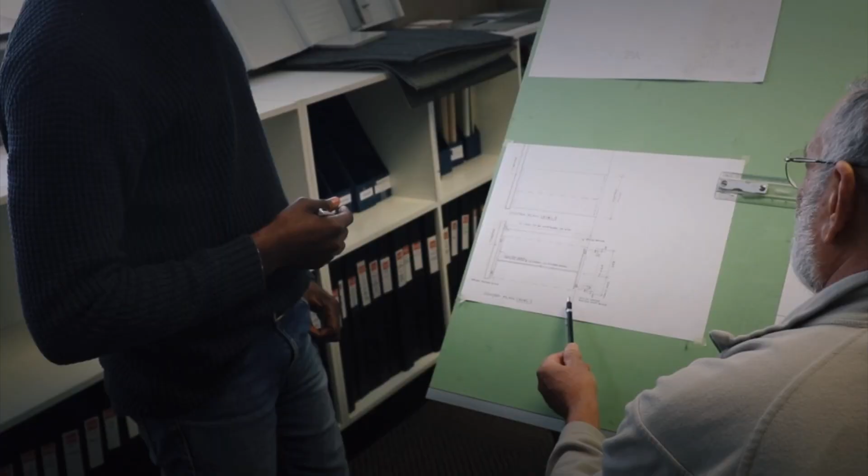Welcome to ACG Architects. We believe in pushing boundaries and delivering innovative solutions. With more than 28 years of experience, ACG Architects, based in Cape Town, is a dynamic, socially conscious professional practice offering sustainable, world-class design solutions for projects of all sizes.

My name is Hassan Asmal. I'm a founding director at ACG. ACG was formed around 1993-94. Myself, Malcolm Campbell, and Geeta Govern, that's how the ACG comes about.

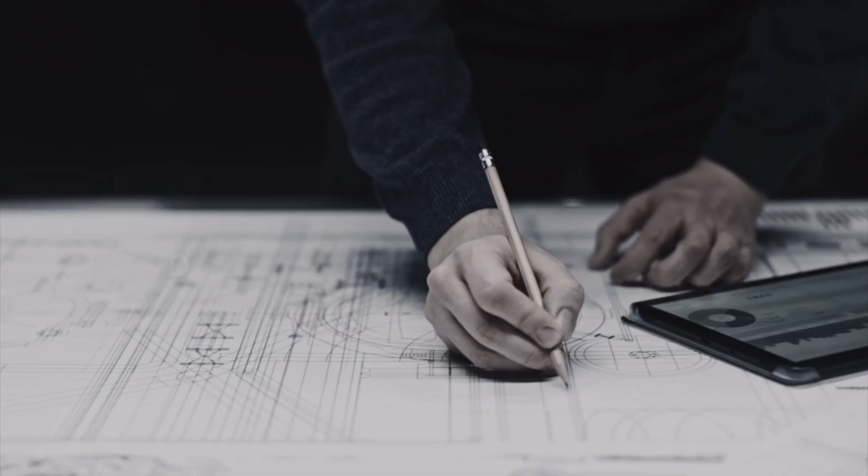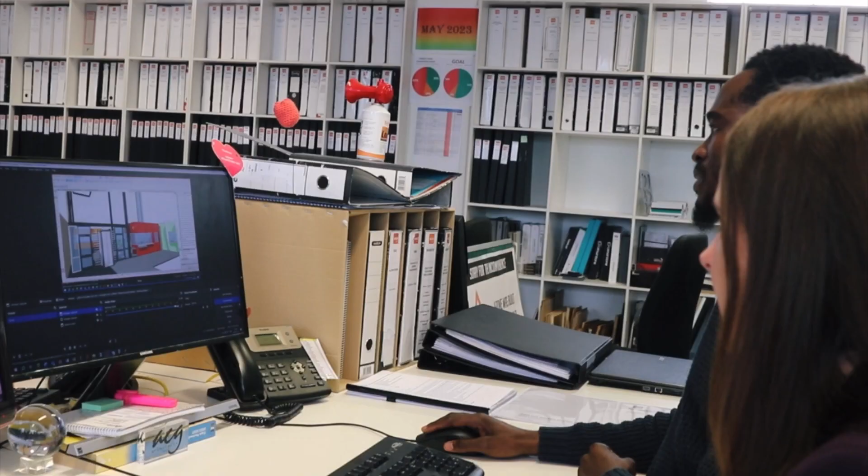It was also an interesting time because architectural practices were moving into the digital sphere. We needed to decide on what platform to go on to. At first, we worked on AutoCAD, which was the program of the time then. Then mid to late 1990s, we were introduced to Archicad. Since then, we have been on Archicad. We've been enjoying it, developing it.

We've even had a time when we looked at the competition programs, and the conclusion by the production team was Archicad is still the program to work with. So we've now stuck with Archicad, which is almost over 30 years.

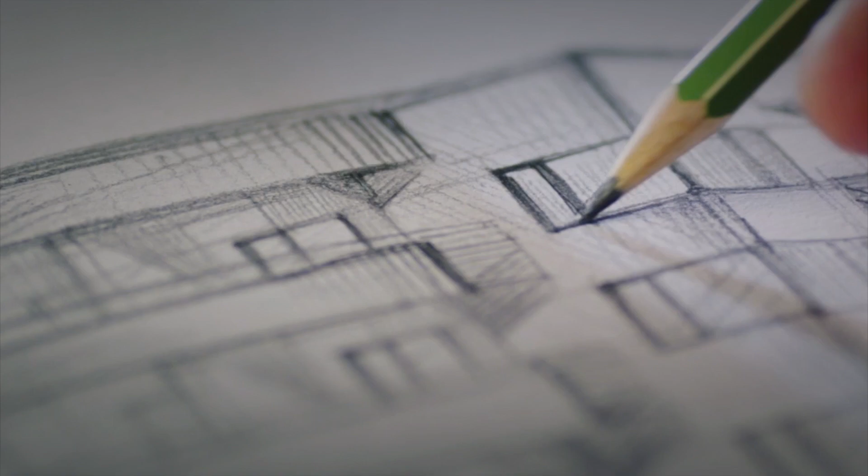In my particular case, that's how it is. I do sketches by hand, pass it on to somebody in the office, especially the ones that are good at doing the upfront sketch design stuff, so that we can get into model form quite quickly. Because I have worked with Archicad previously, and I know the history of its development with updates and things like that, I can input when I'm sitting and talking with the person doing the drawing.

And then we go on as we develop it, knock it around, and get it to a level that we're happy with. After that, I also assist with the supervision of the angles that we wish to use and the stills that we use, and we have a debate around that as a team, so that we get good quality stuff out at the end of the day.

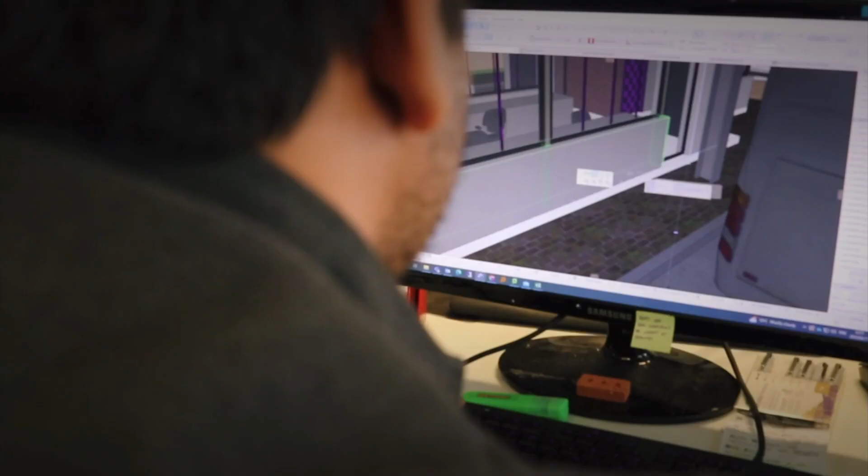With Archicad, I think one of our bigger early challenges was the rendering program. That took a long time to come right, but I think currently we're enjoying the rendering program, and there's people in the office that are doing quite nice work with it, which means we don't need to go out as much to bureaus unless it's really super high level graphics that we need.

So I've been with this company about 17 years, and it was the software that we learned, or I learned, when I started. I haven't really moved on to any others.

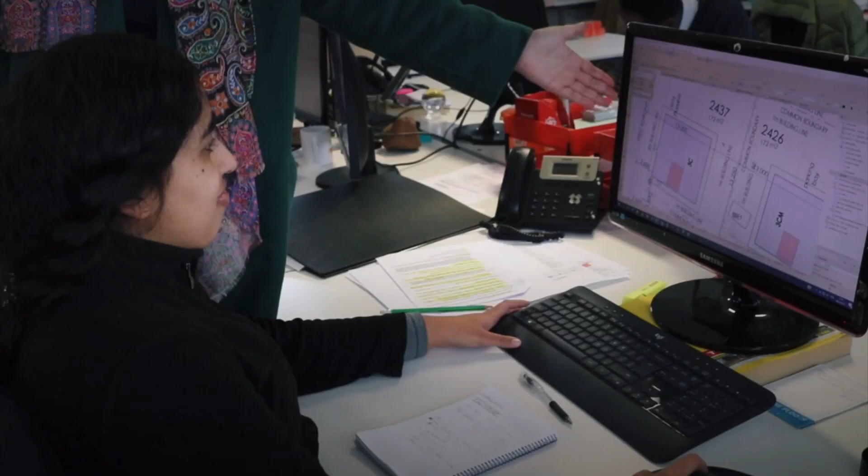Here at ACG we've used AutoCAD and Archicad, although Archicad was the predominant, and eventually we phased out AutoCAD because we could just use all that functionality in Archicad. So it became a little redundant, except when we needed to do some coordination to check if our information was translating properly. But we've worked with Archicad and other users using other software pretty well since forever.

The principle of drawing in 3D immediately, although you are seeing a 2D image on your plan view, it is automatically drawing up all the other elements, with your wall tools and such, automatically. So it does save you a little bit of time. There are obviously tweaks that you have to do afterwards, but that functionality, I think, which is at the heart of 3D software, is the most important part of it. It is the time saver.

Back early in my career, we were taught AutoCAD and how to change the view to make it 3D. What a process that was, having to change the coordinates to be able to create the planes for the 3D. 3D software just does it automatically for you. So at the heart of it, that is the most important part, I think.

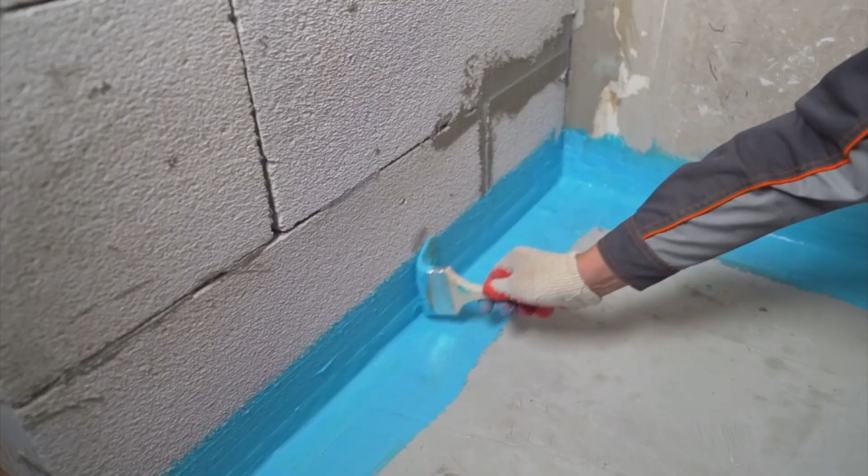Of the functions we use quite often, I think the one that plays the biggest role, and it's the simplest one, is the section tool. It's very easy to get carried away building your model, but often someone will ask, okay, what is the waterproofing here? If you have no idea what that space looks like, you can't actually solve that problem. It's easy to look in 2D, but it doesn't show you where other things might be intersecting that area. So I'd say the section tool is the most valuable one. Even if it's not a section that ends up on a drawing file, it's still very nice to quickly see what's happening in a certain area and how different things come together. That's really great for waterproofing, but also if you need to coordinate structures.

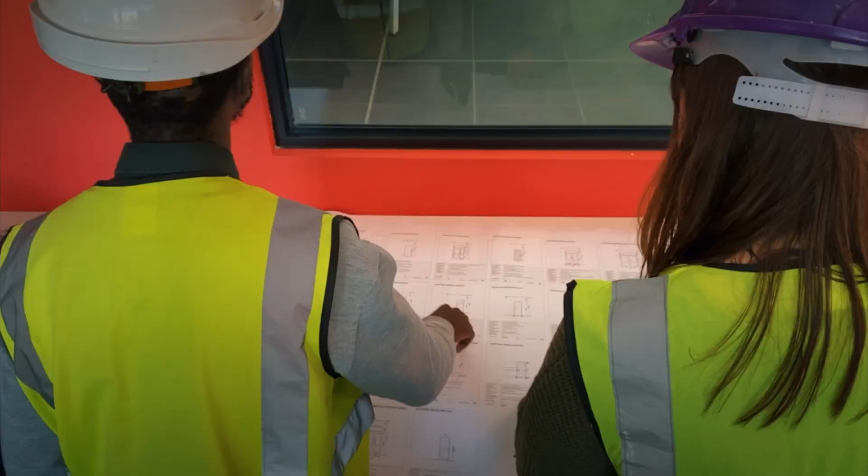I think the benefit of having the Archicad package was that we could visualize the space in 3D. Our construction documentation could be prepared timeously, and the flow from the initial concept to the final construction drawings was more time efficient and more user friendly, allowing us to have other iterations. There were a few versions of the kiosks where we initially had tubular structures, and now we have more cubic structures. So we could have more iterations, all thanks to the Archicad package, where we could look at more options and then decide on our way forward.